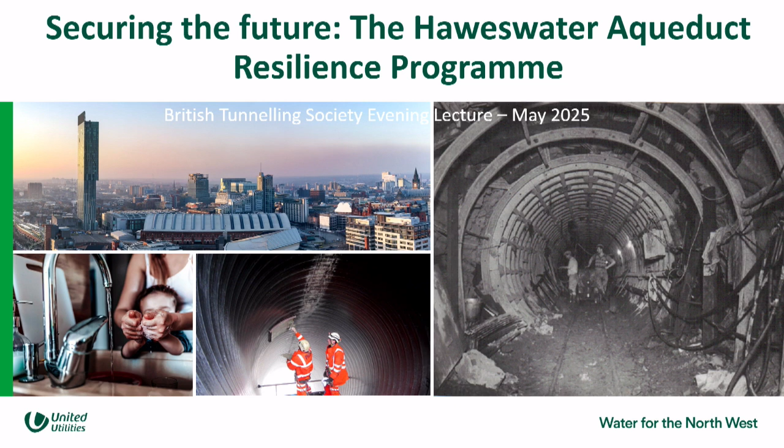So again, just to reintroduce myself, John McNeil. I work for United Utilities. I'm the Head of Programme Delivery for the HARP programme. And then Nick, who's online. Hopefully you can hear us, Nick, and you can say hello. No. Okay, he'll join us later, I'm sure. So Nick will be dialed in, but he'll jump onto his part of the presentation shortly. Oh, is he there? Yeah. He's behind you. We just need to unmute him now. You can see me but can't hear me. We can hear you now, Nick. Perfect. Hello. So that's, after all that, that's Nick's welcome.

So listen, it's fantastic to be here tonight. Thank you so much for the invite. Myself and Nick are both chartered civil engineers, so to be in this forum delivering this to you tonight is a real honour, so thank you for having us. This lecture will explore one of United Utilities' most exciting projects we've ever done. As a company, we're super excited about this. We haven't yet started fully with it in terms of on-site, but we've been at this for absolutely years, and I'll take you on that journey tonight.

So this presentation is going to focus very much on the early phases of the project. We'll take you through how we've identified the problem, how we've identified the solution, and how we've gone about delivering that so far. So what we're going to cover is a little bit about ourselves, United Utilities. We'll introduce you to the Haweswater Aqueduct itself. What are we doing and why? We'll talk about how we're going to do this as well, because this project will follow what for us is a completely novel and new delivery approach, never before done in the water industry, never before done by ourselves. Nick will take you through the technical considerations associated with the project, how we nailed the engineering imperatives really early on. We're going to choose one of our tunnel sections in the Bowland tunnel, which is in the Forest of Bowland, which will just bring to life some of the challenges on one particular tunnel section. We'll talk about planning and stakeholder challenges, and then we'll summarise. So hopefully that will cover and encapsulate the full Haweswater Aqueduct story.

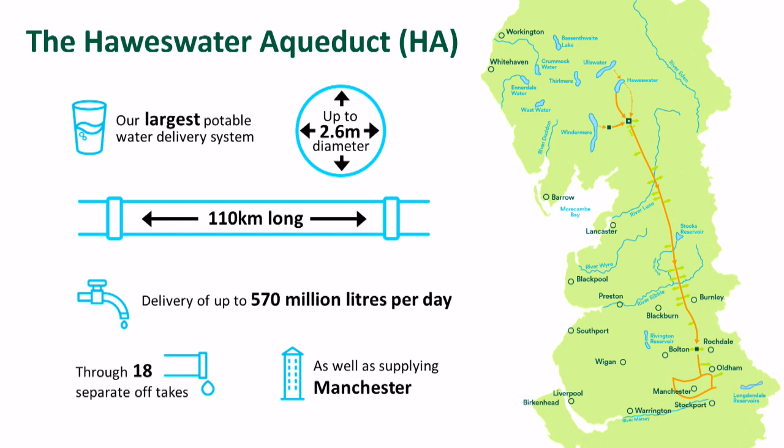Whilst it predominantly feeds Manchester, we also have 18 off-takes as it moves down through Cumbria, Lancashire, into Greater Manchester. So we feed an awful lot of people on the way. Really, really important asset to us.

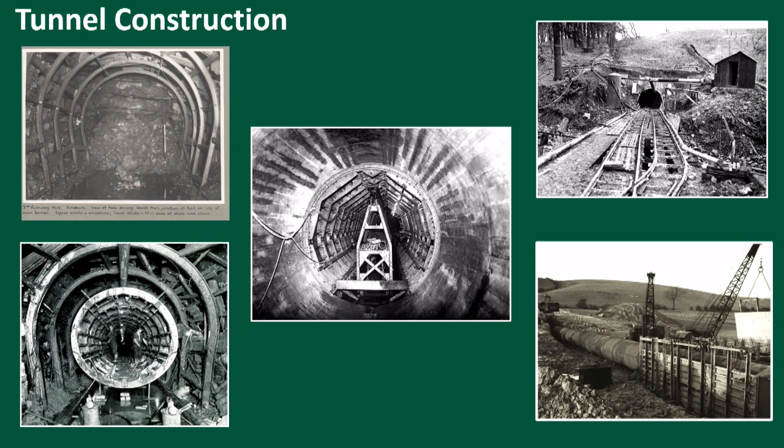Pictures on the top right show how they got a lot of this in and out, temporary railroads. And not all of the Haweswater Aqueduct tunnel sections are done in that way - some of it was actually open cut, which you can see bottom right. So, incredibly important asset. It's been around now 70 years, and it's critical to our operation.

However, things age, and over the years we've begun to worry about its condition. Now, the siphons that I showed you before, the wiggly lines, they can be inspected relatively easily because there's 4 of them. So you can take one out to inspect it, to maintain it, while the water flows through the other 3, and you can work your way along. However, the tunnel sections are single points of failure, so it's been impossible to go and inspect this without shutting the whole thing off. And bearing in mind how important it is, that's just not been feasible.

We did try to have a look inside the tunnel by floating some cameras, literally in the live water down, CCTV. Didn't really work that well, as you can imagine, with this thing carrying that amount of water and everything that's going on in the tunnel. So that didn't really pass as an inspection.

So we knew when we got to around 2010 that we needed to take some other more fundamental steps. And we began to consider the option of just shutting this thing down - we're going to have to shut it down to get in and have a look at it. However, to shut it down and lose a third of your water needs some planning. So we had to invest in tens of water treatment works to make sure that they could run absolutely full chat when we turn this thing off, so that it can provide water to our customers.

But the absolute deal breaker was something called the West East Link Main, a project that I worked on, where our system until then was quite divided. We had Lakes water that fed into Manchester, the Manchester system, and we had water from Lake Vyrnwy in Wales that fed into Liverpool, the Liverpool system. And just like the football teams today, Manchester wouldn't speak to Liverpool and Liverpool wouldn't speak to Manchester. So we built a 55-kilometre bi-directional set of pipes between Liverpool and Manchester that effectively joined those two systems.

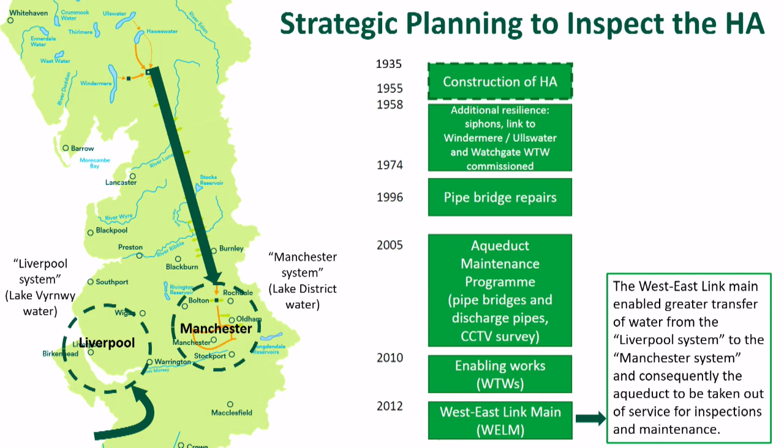So, recognising we only had that limited window, our operational colleague said, right, we can use all these assets you've built us, but we can only give you 2 weeks, or maybe 4 at a push, which is not a long time. And that's because whilst we can increase our reservoirs, increase our regional storage, this thing carries so much water, we can't survive without it for too long. So only having that limited time meant we had to plan, and plan, so we could use every minute to maximise that opportunity. So, believe it or not, we created a Haweswater Aqueduct inspection training camp.

We trained over 400 people in confined space training, in driver training, in emergency evacuation procedures. So this is people who are going to be asked to go down into these tunnels that have not been inspected for 55, 60 years. Defibrillator training, self-rescue training, because the emergency services, as we know, will not go very far into the tunnel at all.

You had to literally be your brother's keeper. This was that on absolute steroids. Could we get someone out if something happened? So we built this training camp.

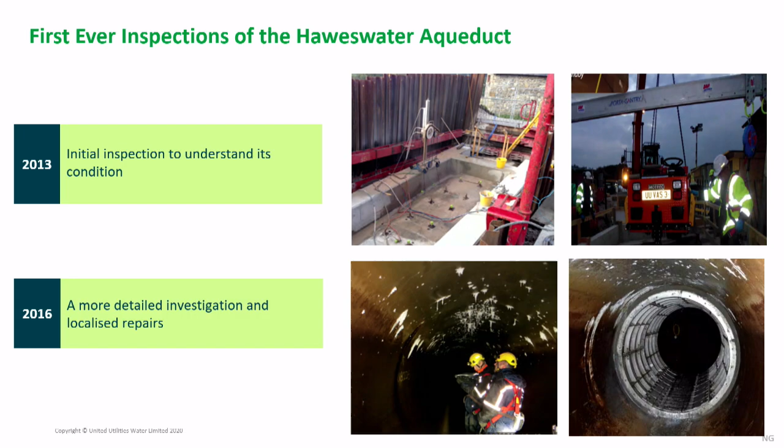So we've been in twice, and we did see things that concerned us. We were able to build quite a comprehensive picture of what was in there. So you can see the range of surveys we were able to carry out, whether it's GPR surveys, EDM surveys, water quality, 360 laser surveys.

You can see the pictures at the top about how the VAS units were adapted to get specialist equipment in. We took some cores, we filled them in before we came out. But after those two visits, we really began to understand what was going on in this aqueduct.

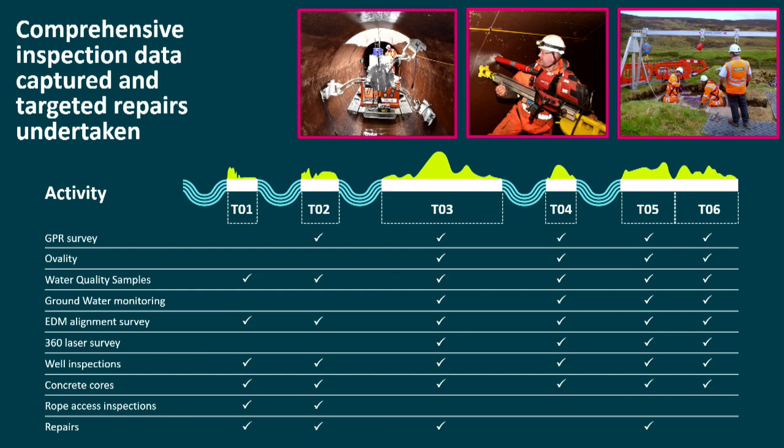And it raised some concerns, two concerns really, and this is what is driving the whole of HARP. So we had a concern about water quality. Could we, hand on heart, say this thing was going to remain a pure food grade product conveying tunnel in the condition it's in? We think we needed to act on that.

And secondarily, there was a broader concern about the interruption of supply to water. So if, heaven forbid, we had a structural collapse, then having dirty water is one thing, having no water is a completely new ball game, because obviously you can do boil water notices, you can flush your toilet with dirty water. If you don't have any water, then it's a whole different matter. So really, they're the two risks that this whole programme is trying to address.

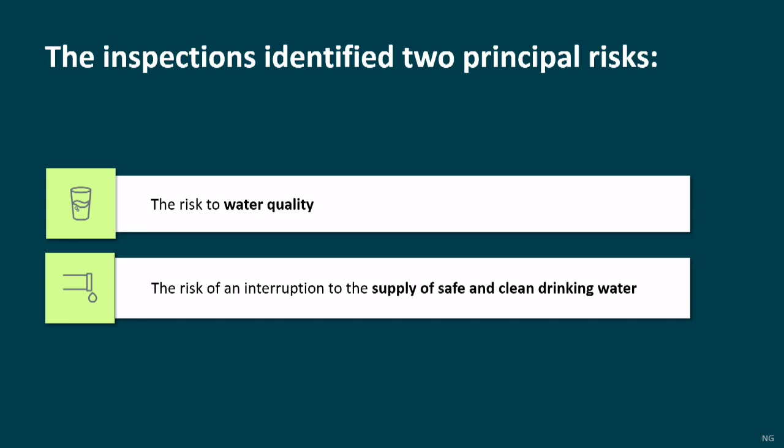We did spot a really worrying part of the aqueduct when we came out, and we immediately mobilised to fix this because it was in need of immediate attention.

So we've been in already, and one particular section we've kind of bypassed. If you remember the 4 wiggly lines, the 4 siphons, we broke into those. Again, this is now the 3rd outage. We connected pipes into that. We ran the pipes along a length of the tunnel and connected back into the tunnel, bypassing this concerning section. So we replaced about 2.6 kilometres of the tunnel.

It cost us £36 million. In terms of this, to give you an idea of the scale, those pipes there that you see the 4 people stood in front of, they're 4 1.6 metre siphons. Hygiene in the middle there, again, absolutely critical, as it always is on the HA.

And one thing that we did in UU, which for us at the time was really quite innovative, is on the bottom right, we were able to use CAD and 4D modelling to do a 4D rehearsal of how this is all going to play out. And we've never done that before. Where machines are going to go, what are the lifting circles, where's plant going to go, where's equipment going to go, where can people walk. And it literally allowed us to make these vital connections far shorter than it would have done had we not had that sort of planning.

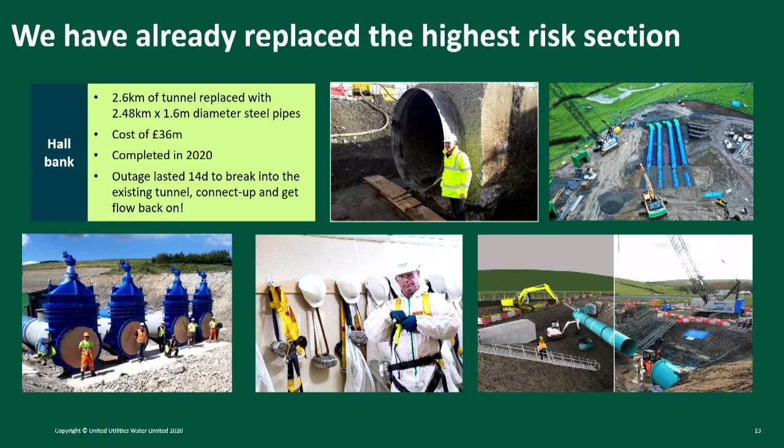So fantastic to get that bit out of the way. But that was only a bit. We still had the rest to sort. So once we'd put that bit to bed and we'd addressed that, we sighed a bit of relief, took a step back and started to reflect on, right, what is it we need to do going forward?

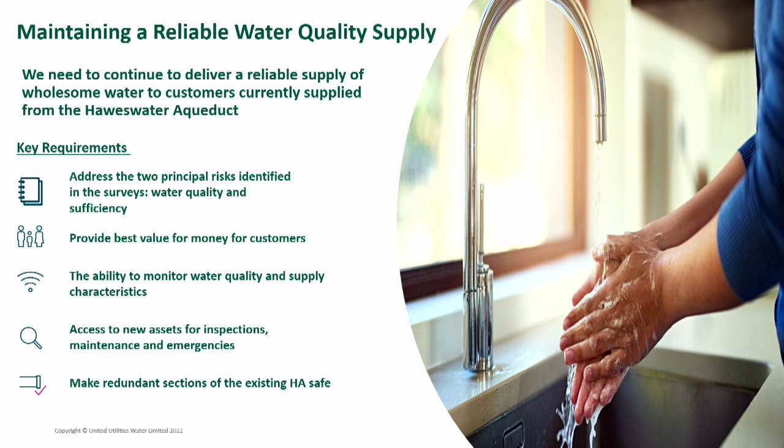What are the requirements to address those 2 risks we mentioned before? Key thing is to address the risks, as I mentioned. We need to provide best value for customers. We're a regulated monopoly business, but we are regulated by Ofwat, our economic regulator, so it's critical we look at a solution that gives best value to customers. We're keen to be able to monitor water quality and supply characteristics better than the old tunnels ever gave us, whatever the solution was. And we needed to factor into our thinking, how do we make the old tunnels safe?

So with those requirements in mind, we set about looking at options, and we really cast the net wide on this. We started off with over 300 options. We coarse filtered it down to 50, to 30, to 10. We got into fine filtering, but we looked at everything.

We looked at, can we simply go into the existing aqueduct and just patch it up, make a few repairs, it'll do - one option. Can we convert it from being a potable water tunnel to a raw water tunnel, so we have raw water coming all the way into Manchester and build a super treatment works down in Manchester - another option. Can we treat it en route? Can we line it? Could we close it down altogether, get rid of it and look for different abstraction options elsewhere?

Manchester Ship Canal, groundwater supplies, River Dee, etc. No stone was left unturned. We looked at absolutely every option.

This whole while we're in communication with Ofwat, sharing our ideas, giving them an idea of the way it's going. We looked at capital cost, operating costs, carbon. We had customer focus groups, willingness to pay, because this is going to be an expensive job, right? So we had acceptability panels - would you be happy to pay X amount on your bill if we went with this option or this option? And obviously looking at environmental and service benefits.

So we did all that, and what we came back to is that the preferred way forward was actually to create new tunnels to replace the old. And you kind of think that took us probably 3 years to get back to the answer where we started. But it was a job well done and gave us that surety that was the answer. And so that was it.

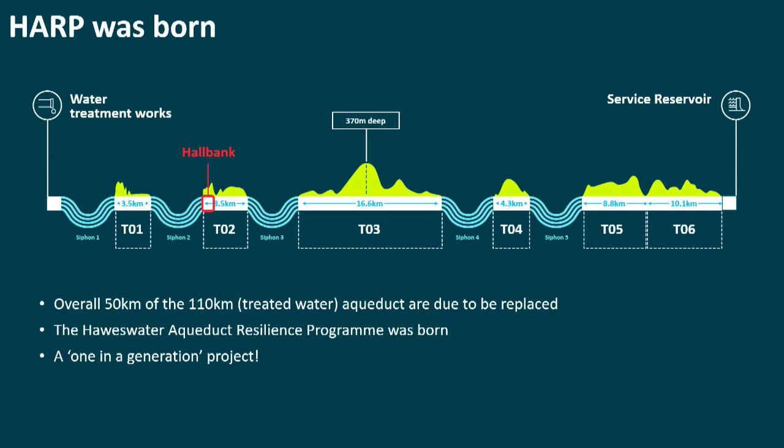I'm just going to show you a little video now, just to bring some of that to life.

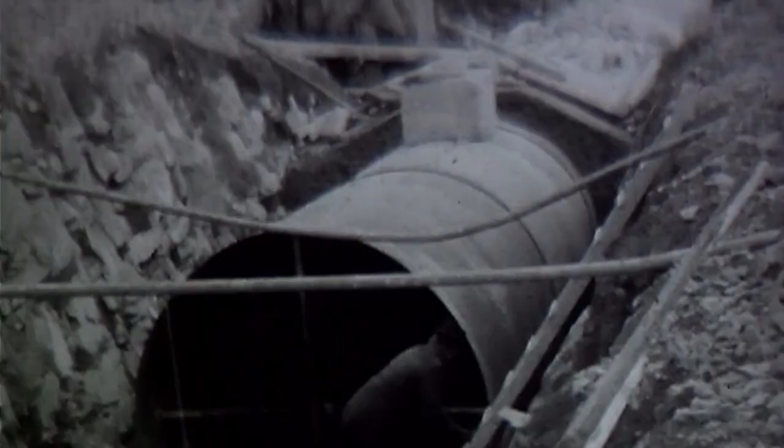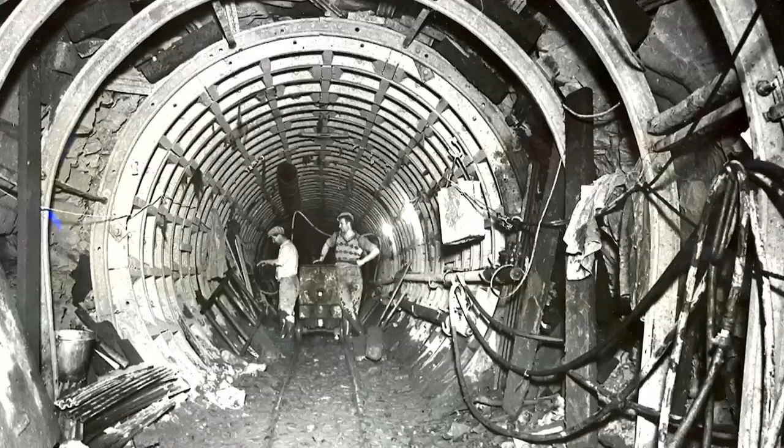The aqueduct is now of great importance to Manchester district, to the surrounding industrial area, and to many water undertakings supplied in bulk by Manchester. The ultimate and far greater importance of the Haweswater Aqueduct, when 100 million gallons of water a day are being delivered, will surely cause future generations to be very thankful for all that has been accomplished.

Okay, so that first bit has all been about what we plan to do and why. Before we jump onto the technical aspects, I just wanted to explain the how, and it's how we're going to procure this. As a UK water company, our economic regulator is always looking at ways of encouraging more efficient ways of delivering schemes, particularly schemes at this size, for the benefit of customers.

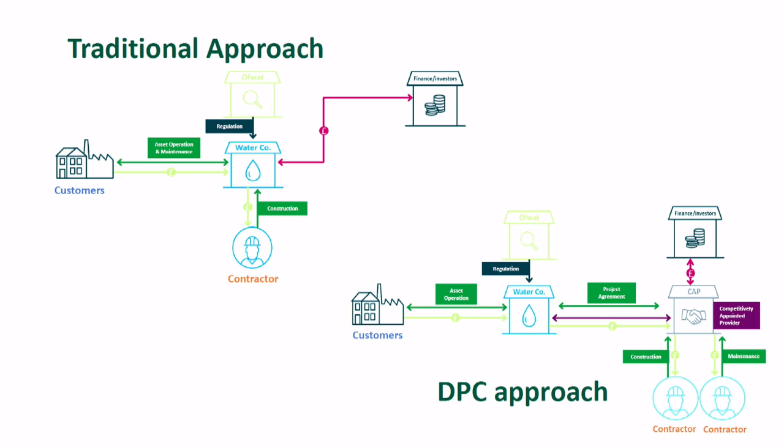The late model is a slightly different twist, obviously, where the appointee holds on to it for a bit longer. So they might develop the design themselves to a higher level, they might initiate studies, get the planning in place, and procure it a little bit later.

We chose the second option for HARP. We went for the late option, and the reason for that is we felt in the interest of our customers, they would benefit by us de-risking the project by holding on to it that bit longer. So bearing in mind the characteristics of the HARP project, tunnelling, ground, having an understanding of the ground and the ground characteristics and the risk, we felt would be better to do that before we approach the market.

It also allowed to de-risk the sort of schedule breakers, so purchasing land, getting planning in place, things like that. We thought we can do that. That will obviously make it a less risky proposition.

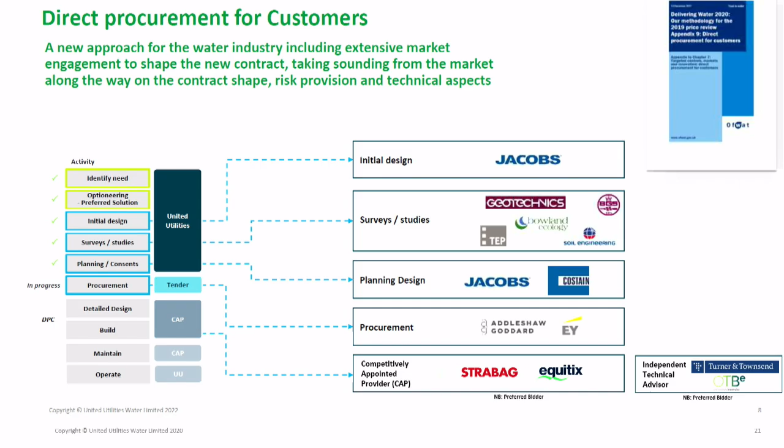So that's where we are on the overall timeline. It's been a long-running beast, this. We are here just at the end of that tender activity, and we're looking to step into financial close or contract award in the coming couple of months. We then are looking at probably a construction period of 7 to 8 years, with multiple tunnels being driven at the same time. So hopefully we'll have a brand new aqueduct come 2033, and then after that follows the 25-year concession period where the CAP still owns and maintains the asset.

Okay, that's me. I'm going to hand over to Nick now, who's going to jump into some of the technical considerations of how we've got to where we've got to on HARP.

So I'm hoping the tech works. Oh, he's there. Brilliant. Hopefully, John, you can see me. Can you hear me? Yeah, we can see and hear you. Brilliant. Okay, thank you for bearing with me the fact that I've had to dial into this. Yeah, I'm sorry for not being there in person.

As John suggested earlier, my name's Nick Sharwin. I'm Head of Construction for United Utilities. Today I'm going to delve into a couple of the aspects around the technical considerations on HARP. We'll be looking at the engineering imperatives, which, building on the work that John's done, are those things that the organisation as United Utilities deemed important that we wanted to cover.

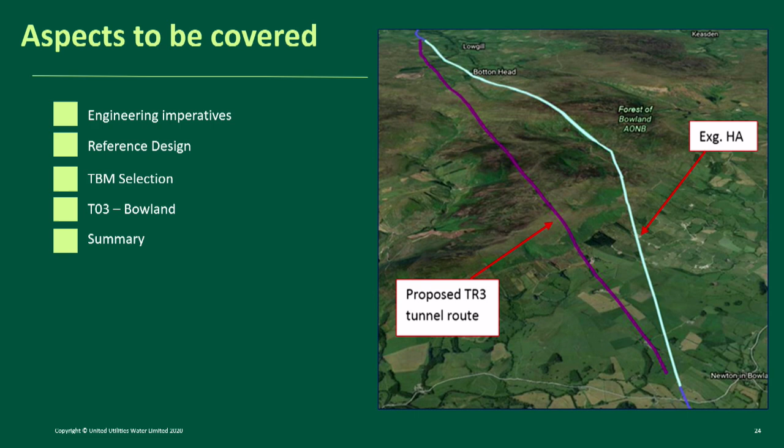Okay, so we'll go on to the engineering imperatives. This is really what, from an engineering point of view, is important for United Utilities, and some of them are actually enshrined in what we call our output requirements. Just the things that are really important to us.

John's already touched on the fact that it's a potable water tunnel, very different from a tunnelling point of view. The fact that this will be carrying potable water, so the work we're doing around water tightness, for the water quality, is really important - that we can be comfortable and confident that the asset we design and construct does provide that water tightness to ensure water quality.

The other thing is reputation-wise, very key - the engagement that John spoke about earlier, to get to where we've got to so far, really engaging with the supplier, with the customers, to make sure that this is going to enhance our reputation. The length of the aqueduct all the way from the Lake District right down to Manchester means we are dealing with a huge different number of communities and stakeholders and customers. So we really needed to focus on that and make sure we were considering that. John will cover more details on that in the upcoming slides.

Connections - it's really interesting just to think about HARP as a tunnelling job, a nice and easy tunnelling job, like all tunnelling jobs. But the connections can be somewhere where it can be a little bit more difficult, and certainly when we interface with operations, making sure we do that appropriately. John's explained the challenges around getting outages for this aqueduct, so any of the connections we're looking to do, we needed a good understanding of what we needed to do and what the controls and engineering imperatives were around that.

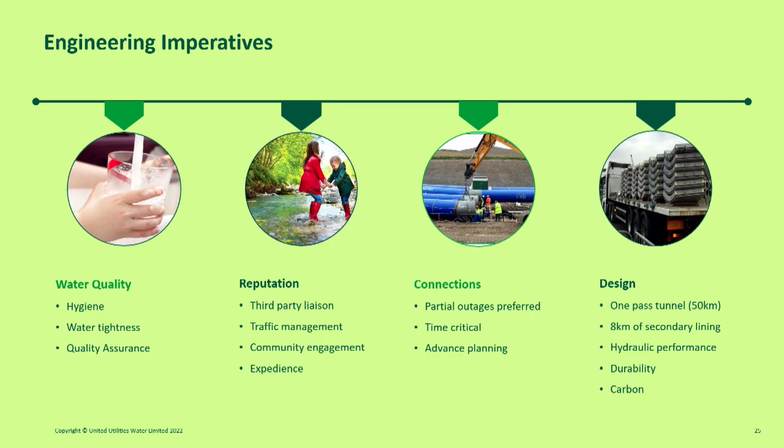I'm going to start with carbon, so just look at the carbon approach that we took on HARP. Large infrastructure projects typically come along with large carbon impacts. I don't think it's unusual for people to see that, but we recognised as the project team, working with our partner Jacobs from a design point of view, we started thinking about this early and looking at how we can actually baseline what we believe the carbon impact would be. So we baselined that early to get an understanding of that.

Which was good from our point of view, because it then started to identify some early opportunities. You could look for your biggest wins, look where the impacts were, and where we could look to try and do something differently. And with it being the late model we went for, there were real opportunities that as the appointee we could get into.

So John's already spoken about things like land and getting purchasing in place. One of the big things we've put in place is around power. We're all aware that tunnelling machines are a hungry beast, and getting to some of these sites is difficult. They are in remote locations. So if we hadn't grabbed that early and got the services in place, we would have been running these tunnels on generators. So we really looked to grab that early, make an impact on that.

The other thing, the picture you can see there, it's an old quarry. We looked to secure the use of that local quarry very close to the Bowland Forest tunnel. So we're going to work with them there just to minimise traffic movements, but also minimise and enable that reuse of tunnel material. So once we did that, we took it as far as we could.

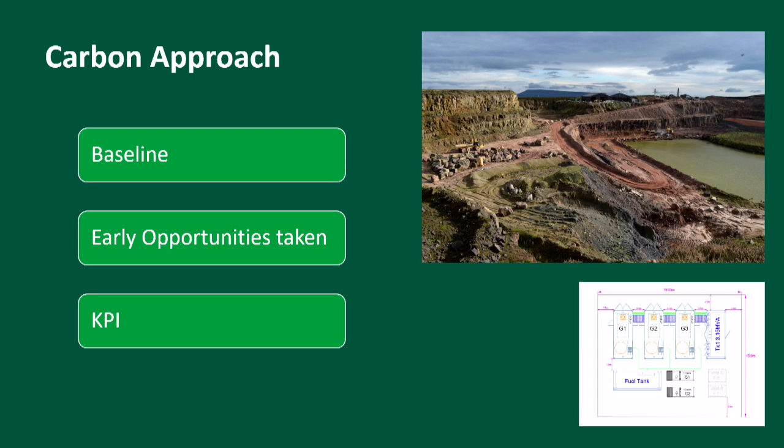We then started to look at how we can measure performance through the project and ensure that the competitively appointed provider was taken on that journey with carbon. So within the PQQs, the pre-qualifications, the invitations to tender, the tender scoring, there were measures and questions allocated around carbon to ensure that we continued on that, with ultimately the contract having strict targets to outperform the baseline and look to see where we can really maximise that through KPIs.

So building a little bit on that and going a little off topic, I just wanted to talk about the Net Zero Tunnelling Group, nothing to do with HARP specifically, but something that I've started to get involved in, and some of you may have already heard of it and are actively involved in it. This is a new group that was launched last year, linked with the British Tunnelling Society, a subsidiary of the BTS. The purpose really is to accelerate progress towards net zero carbon tunnelling by sharing knowledge and ideas and shaping best practice.

There's a QR code we can share, and a couple more slides just to show who we are, some of the faces there you may recognise. There are more people actively getting involved. Just to give you an understanding of the first six action groups that we've developed, to try and help drive the tunnelling industry particularly forward with this.

So the digital tools about carbon calculations and measurements, really important, because everybody's got a slightly different way of doing that, and to really drive this forward there should be a standardised way. Looking at design, what impacts can we have from a design point of view. Material use, looking at innovative materials we can use. Just a step-by-step guidance of how we can support carbon reduction within tunnelling, mapping along to PAS 2080, bringing that along within the industry, making sure tunnelling aligns with that, and then exciting opportunities around geothermal engineering from underground structures.

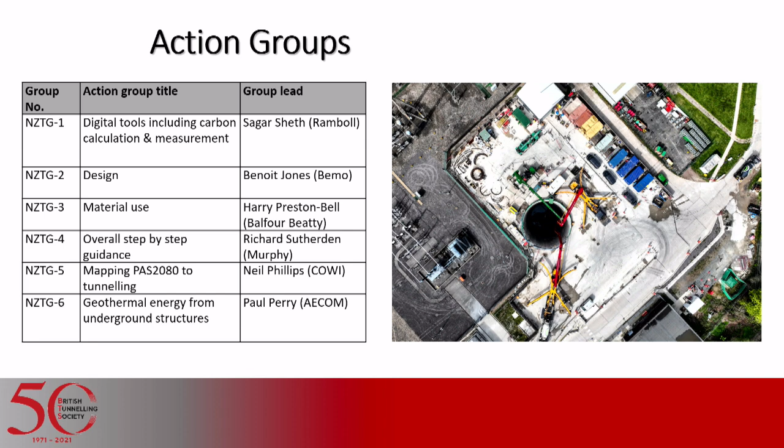So there's a few names there, just to help doing that. If anybody is interested in joining that group, please contact us. Just share the information, allow people within the industry to understand what this group is about. It's a fledgling group, it is starting out, but the more people that get involved in it, the more we get a chance to spread the word about it, the more impact it'll have. So a bit of a plug there for the group.

So we'll go back into HARP now. Level of design, quite interesting - we had lots of debates about the level of design that we might want to undertake. We were very conscious that there were certain things we needed to firm up for ourselves, making sure we were comfortable with the level of design, some of those engineering imperatives and outcomes we were looking for.

As a business, we needed some element of certainty from a design point of view, from a water quality point of view. But there were also areas around planning to get this project moving - we needed to get the planning secured, the environmental impact assessments undertaken. So some of the ways of working, some of the methods had to be developed to a level that would enable confidence.

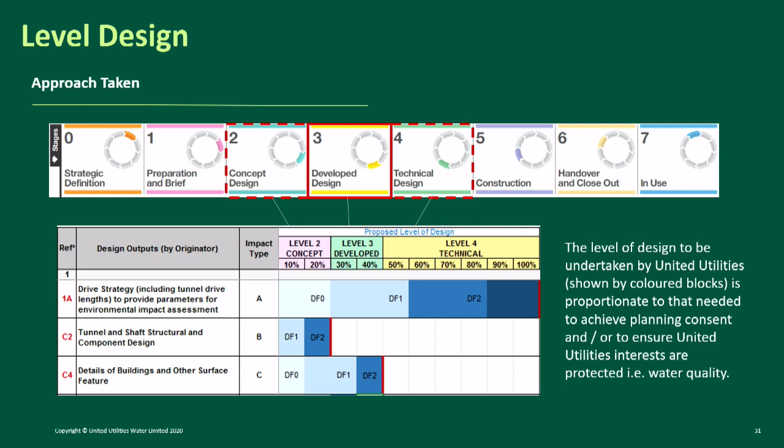So a varied approach to the levels of design, which worked pretty well for us - I think that was a positive thing we looked to do. Next, the reference design - I'll touch a little on this. Again, it's building on the DPC model we look to work with, the late model, so we had to support that. There were some elements of design we needed to take further to help with planning and the consents.

For example, John's spoken about the ground - really important for any tunnelling job and shaft sinking job, you've got to understand the ground. So we needed to make sure we could get that. We did utilise the early contractor involvement with Costain - we appointed Costain as our ECI, and they helped identify some of these key considerations as we worked through this design and determine solutions that could be implemented to overcome those key considerations.

But we were always minded to be aware of the flexibility we had to leave in the cap. We couldn't be defining all these things to the nth degree, specifying tunnelling machine specifications, writing those types of things. We had to make sure it's proportional to enable that flexibility, to drive that opportunity for the cap to innovate. But there were specifications we did look to provide - back to water quality, the water tightness, the longevity, all those types of things - we made sure we specified that, ultimately confirming we did have a deliverable solution.

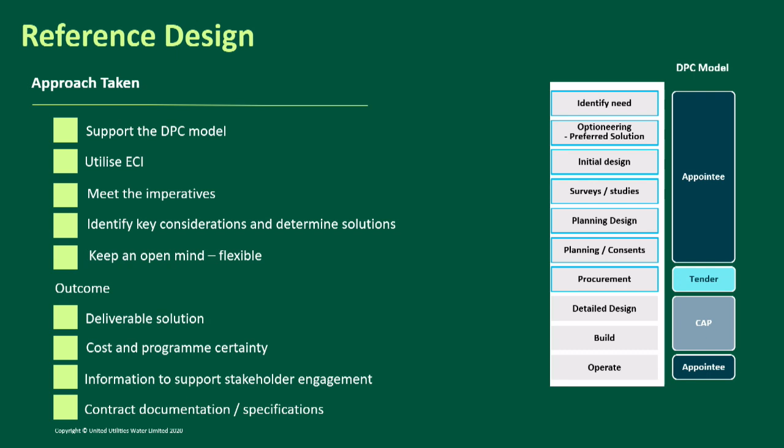So we'll move on to a couple of the key factors we looked at for the tunnelling. There are many ways you can determine what these factors might be, but we set out a framework for all of the tunnels we looked at, just to step through each factor that we thought needed to be confirmed.

So again, no real shock here - we're going to start with the ground on a tunnelling job. Just trying to understand what the expected ground conditions would look like: strengths, jointing, pressure, gases, atmospheric things, water flow. Then what is the groundwater condition we may be coming up against - pressures, volumes, that type of thing.

Permeability, we've got the tunnel lengths and the drives, we needed to look at those. We've got the anchor points for the wells, for the siphons, as John's shown earlier. There isn't much you can really go away from that point of view, so you've got the ultimate length almost defined from that.

Diameter wise, the hydraulic requirement for the diameter is about 2.6 ID, 2.7, something like that. That was a minimum, something we defined early on - it had to pass a particular flow. We didn't specify a diameter, we just specified a flow that we wanted, a volume we wanted through the tunnel. We wanted to convey it by gravity.

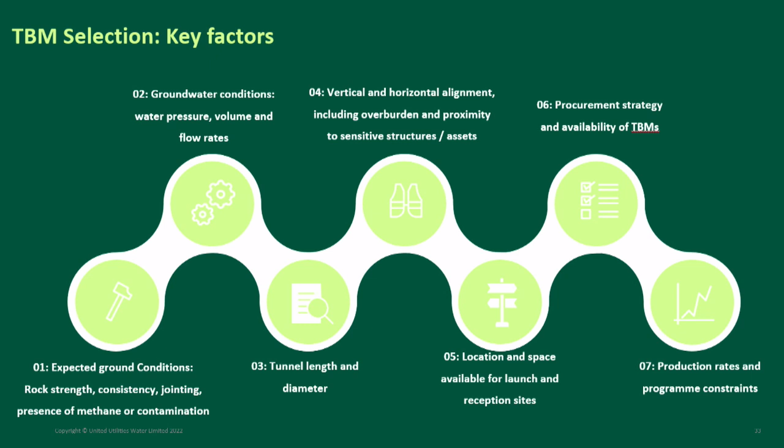And then having a think around that about production rates - what is particular machines and likely production rates going to be, and how will those programme constraints impact on the other tunnels and potential connections back into the system for the outage. Those were some of the key factors we considered.

So building on the first one for the ground - I think when we first started to have a look at this, and you look through lots of the old historical records, you've seen some of the photos that John put up in the video. We got some really, really good photos and geological records, geotechnical records for the existing Haweswater Aqueduct, lots of face records, lots of drawings, everything from that point of view. So that was a really good starting point.

But obviously we're not going to build the tunnel exactly where the existing tunnel was. So the face records, although interesting, weren't necessarily a true reflection of the route we were going to pick. There was definitely a challenge around the ground investigation up in the north - very remote access, and central sections in an area of outstanding natural beauty. There weren't lots of historical records around there in terms of others using the BGS records. And as you got towards Manchester, there were lots of good records, but again access constraints in industrial areas made it difficult to get access.

So we worked really hard at thinking about how we can get enough information about the ground to provide us with confidence, but also supply chain confidence that we understand this ground and that it can be managed and priced appropriately. So we worked really hard to look at geophysics - shallow geophysics, deep geophysics, and we did some boreholes.

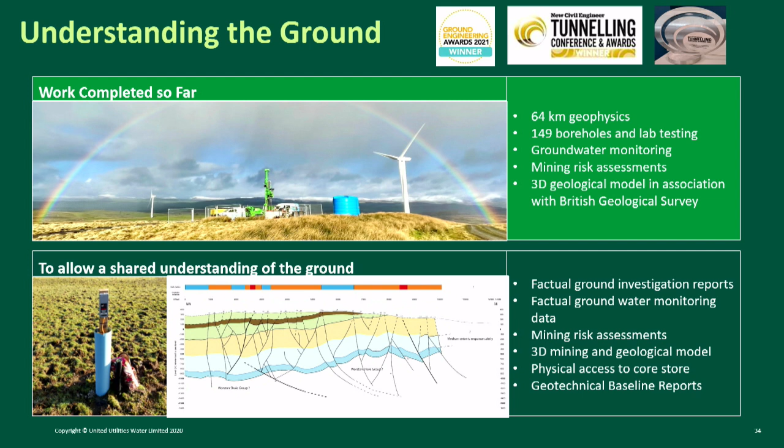So with the boreholes that we had, the geophysics that we had, and some targeted areas around faulting zones and things like that, we were able to build a really good 3D model that ultimately helped us develop a robust geotechnical baseline report and a GBR that the market were comfortable to work with.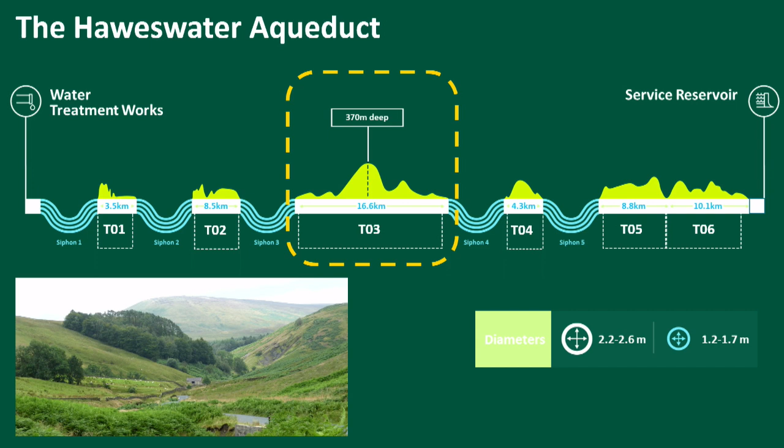So we'll go on a little bit more about Bowland Forest. We've picked that really. If you look at that section on the screen now, it's the interesting one for me from a tunnelling point of view - it's the longest tunnel drive there, and the deepest. So your eye is ultimately drawn to that. Initially, it was like, what's going on in there? That looks interesting. So we'll run through some of the key challenges we've got there.

So a little bit about the Bowland section, Trough of Bowland. Anybody that knows it, you've got the Forest of Bowland there. The graphic on the right hand side shows we are in the middle of nowhere. You can just about make out it's a bit of a forest and we're going over a fell. The photo on the left is just an indication of the remoteness of it really.

There's one long track that meanders across the fell, not particularly easy access. That's what we had - a remote location, rural communities as well. The last thing they were probably expecting when we first turned up was to say we were going to build a new tunnel through there. I think some of them were unaware that there was a tunnel there, if I'm being honest.

Lots of farming, environmental impact, area of outstanding natural beauty. We had Ospreys in the area, triple SI, lots of things you'd expect looking at a Google map of the area. Nice part of the world, with lots of people for tourism and that type of thing. Doesn't make it easy for building tunnelling projects.

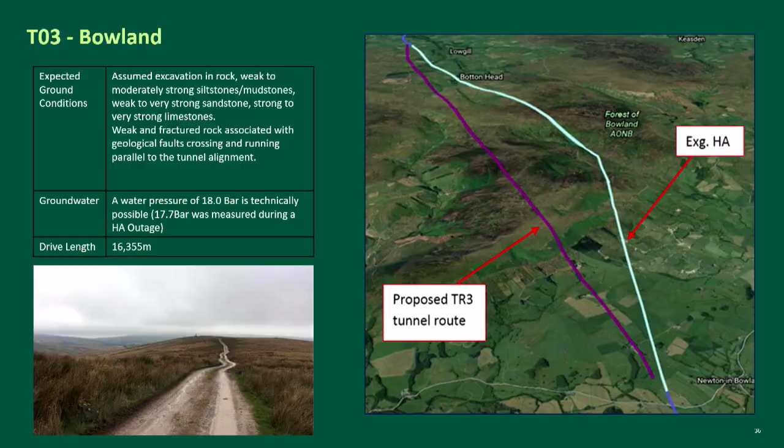So if we look at the technical aspects, trying to show with the graphics on the right hand side, the depth - 300 metres plus tunnelling, not something I've typically expected to do within the UK. The bottom section, the blue line is the existing HA, the others were options. We looked at a number of options on all of the drives, but particularly in the Trough of Bowland.

16 kilometres, we were very, very nervous about that length of drive. Is that something we can do at this diameter? Are we sure we can do that?

We did look at alternative locations for intermediate shafts. The green area on the bottom right-hand graphic is the area of outstanding natural beauty and the triple SI, so building anything within there became very difficult - you saw the access to that. And ultimately you'd then have to put an intermediate shaft that was circa 300 metres deep, again not a particularly easy task sinking a shaft that depth. And what benefit would you ultimately get from doing that?

So access was very difficult from the northern section, the left hand side of the graphic, so we had to drive from the south. That became quite obvious quite quickly - just getting vehicles, HGV vehicles, to the northern section was difficult. So that became the obvious drive location, driving uphill from that point.

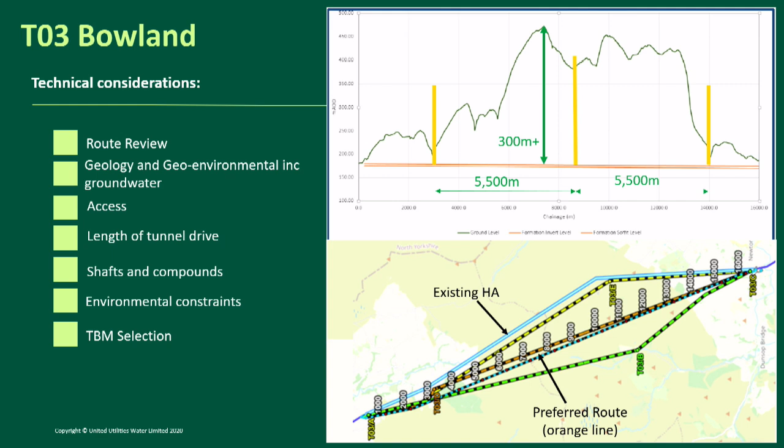And based on all that, we went through the TBM selection that I spoke about before, which we'll cover. So I'll look at a couple of these technical considerations now, just to try and bring it to life.

Again, access, we've spoken about the challenges and difficulties getting across the moor. Site locations are typically significant distances from major infrastructure, with rural roads and through rural villages. We worked hard with Costain to understand what traffic movements would look like, working with the council and locals to figure out how we can make this project work. We're not going to be nipping in and out here, we're going to be here for a number of years, so we need to minimise that impact on customers, the local community, the environment and businesses.

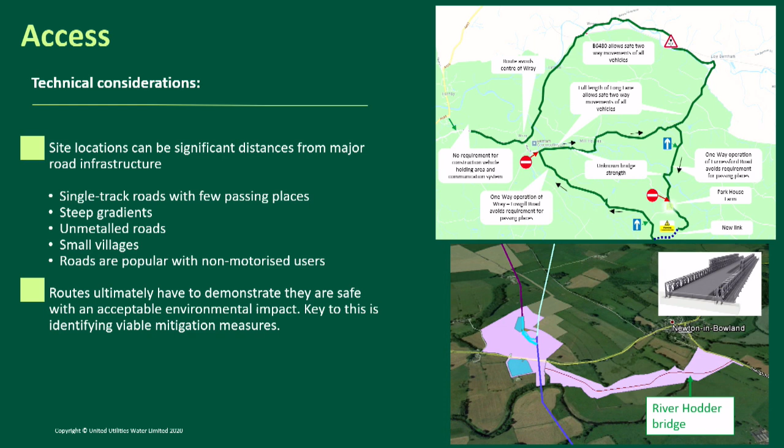The graphic on the right gives an idea of the diversion routes we're likely to put in place and how that can impact the community. The bottom right graphic shows the route to the launch compound for the Trough of Bowland. The Bowland Forest needed a couple of kilometres of road, ultimately with a bridge across the River Hodder. That bridge we're putting in is going to be about 100 metres, just to keep you outside of the EA flood zone. So significant temporary works and infrastructure has to be in place before we even look to do tunnelling. But the communication we've had with stakeholders and customers, they've been accepting of that and understood the approach we've taken.

Going back to the groundwater, I touched on this a little before. As part of the existing HA inspection, we believed the water was maybe 17 or 18 bar pressure. There was a little scepticism about how true and real that was. But then we undertook some ground investigation and hydrogeological assessments, and a number of times it came back suggesting it was at 27 bar.

A machine at this utility size, down the 3, 4, 5 metre diameter, operating at that pressure isn't something I've necessarily heard of or done, and I just don't think it's achievable getting seals to operate like that. We had a good conversation with a number of manufacturers and found it difficult from a temporary point of view, but from a permanent point of view, we've already established that water quality is absolutely imperative for United Utilities. We need a lining design that can meet BTS class 3 and protect that water quality. So how do we do that with a potential external groundwater pressure of 27 bar?

So we engaged Motts to look at some lining design, and to determine the feasibility. We spoke to gasket manufacturers to get their thoughts, what their research told us, what examples they might have. Keeping in mind we were predominantly looking for a one-pass tunnel lining system. So a real challenge to keep the water tightness at class 3. We're conveying potable water — how do we get this to work?

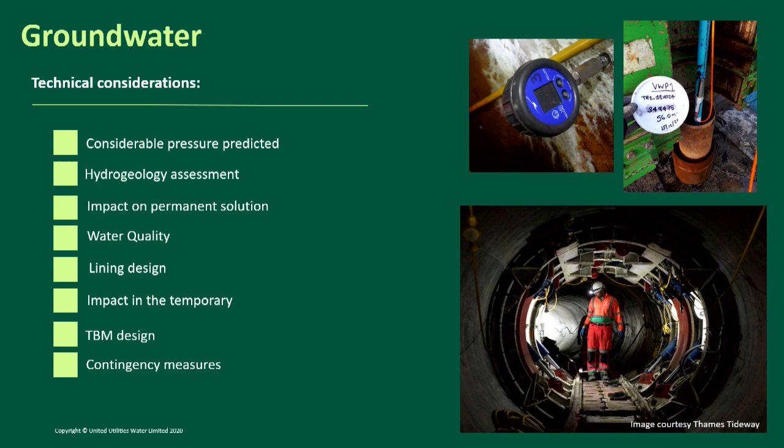So I've touched on the temporary works a little there. Alongside the water pressures in this particular tunnel section, we've got the length of the tunnel, 16 kilometres, again outside the norms for this typical diameter of utility tunnelling. Not something we've done in United Utilities. Some people have done above 10 kilometres — I know LPT2 just completed their tunnel down in London at over 10 kilometres. But again, it's not an everyday run-of-the-mill activity to build tunnels at this diameter for that length.

So we looked at talking to people, tunnel manufacturers, talking to contractors, and making sure through Costain we could satisfy ourselves that we could do it safely ultimately.

Can we build a tunnel, or can we expect the competitively appointed partner to build a tunnel that's 16 kilometres long at this utility diameter safely? So we had several meetings with the HSE to look at the practicalities of the long tunnel. Really important that we could come to an agreement that a particular tunnel diameter is appropriate for this tunnel length. We looked at the ventilation, the fact that the machine is going to be an open face machine, the ventilation and the atmospheric monitoring, really important to make sure that that was in play. Emergency planning, making sure that we could get a casualty if we required out of the machine, making sure we could do that in a safe and practical way.

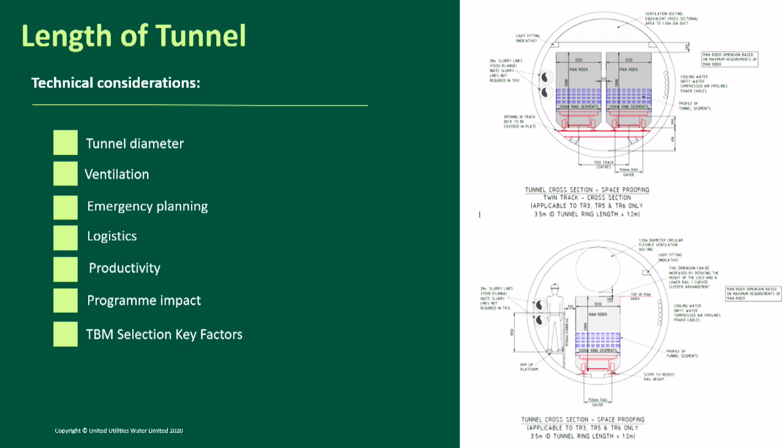So if we sort of tie that back together for T03, the technical issues, for this particular tunnel, we've got the moderately hard rock for the tunnelling machine. There'll likely be high attrition rates on the TBM. We've got faulted zones that we identified through the geophysics. We did some targeted ground investigation there to prove that those faulted zones were there. There's an option to pre-grout some of those areas to try and tighten that up, because the expectation is that we'll more than likely get the flow of that water and that pressure from those faulted zones and the potential fissures that we might have on the way.

We did feel the open face TBM was appropriate. That's what we worked with our reference design. This isn't conformed into the document. This isn't anything that we specified. This was just to allow us to convince ourselves and satisfy ourselves that it was achievable.

The challenging access that we spoke about on the terrain meant that the intermediate shafts were a no-go, and could we make it work for the length? We believed we could. So one of the things we did look at with the manufacturers was type of tunnelling machine, and settled probably on a double shield. Again, this is only our opinion, the work that we've done with the manufacturers and with Costain, but a double shield TBM open face would increase productivity and help with the programme constraints, meeting the programme. And then just that allowed us to understand the impacts that it had on the wider HARP project. With this being the longest tunnel, it naturally wants to fall along the critical path.

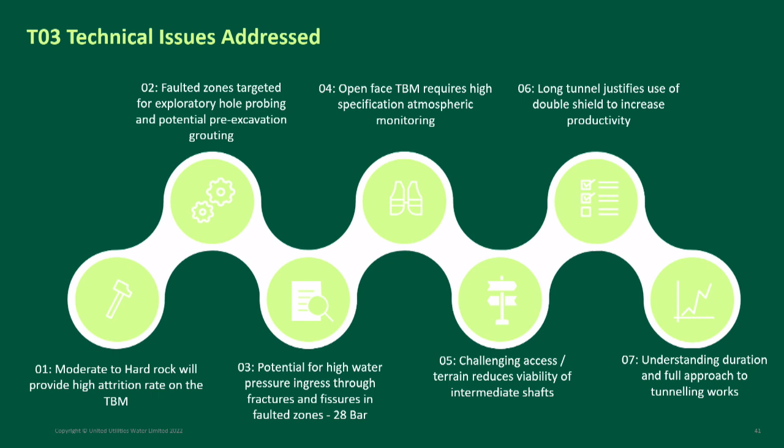So just to summarise the technical considerations, the real whistle-stop tour there on one of the tunnel sections. There's 6 of them, and they've all got their own exciting challenges that we've had to step through. So I think because we had the late model, we had the opportunity to step through these challenges. I think it was a really good thing that we did grasp the nettle and work with some of these challenges, really drive and understand what that risk looked like and how we could manage that.

Things like the groundwater, confirming that, I think was a real positive step just to understand what we may have. The proportional design approach that I spoke about before, I think we've delved into areas where we needed to delve into, and we've pulled ourselves back where we haven't had to. So that's helped us really with that and drive a deliverable solution that is positive. And I think because we understood where our risk appetite sat as United Utilities, we could really help with that proportional design approach where we needed to confirm that, whether that be about water quality or from a customer and stakeholder point of view. We could go a little bit further with the design, but leave opportunity for the supply chain. And all the good work that we did around the technical considerations really did help feed into the stakeholder conversation and support the approach as to why it was and make that a richer conversation.

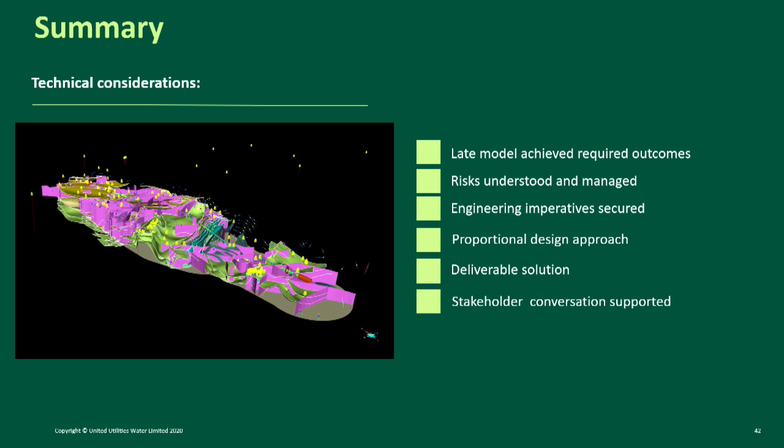As Nick mentioned before, doing all that outline design work really helped us engage with purpose on planning and stakeholders. There's clearly a vast range of people impacted by this scheme, and with HARP being a linear asset, it's long.

We've been speaking to 7 different planning authorities. We've needed 9 different planning permissions. Someone told me there were like 1,600 documents we've had to produce to get this over the line, including one with Yorkshire Dales National Park, which from a North West water company was a bit odd, but that was okay. I'm happy to say they're all now in place, so it's tick, tick, tick, tick, tick times 9, which is great.

We've put in place 2 extraordinary highways damages agreements, because if you think of the amount of traffic this is going to produce in fairly rural environments, and we're going to be working in areas of outstanding natural beauty, rural environments, urban environments, under the M6, under the West Coast Main Line, in remote locations - it's a huge range of challenges and a huge range of views and opinions from people.

MPs and council leaders, because this project's been going so long, have come and gone, so we've had to speak to them and speak to them again. I was up at Lancashire County Council yesterday, being introduced to the new council leader, a reform candidate. So there's a whole new set of MPs and council leaders there, right in the middle of the patch.

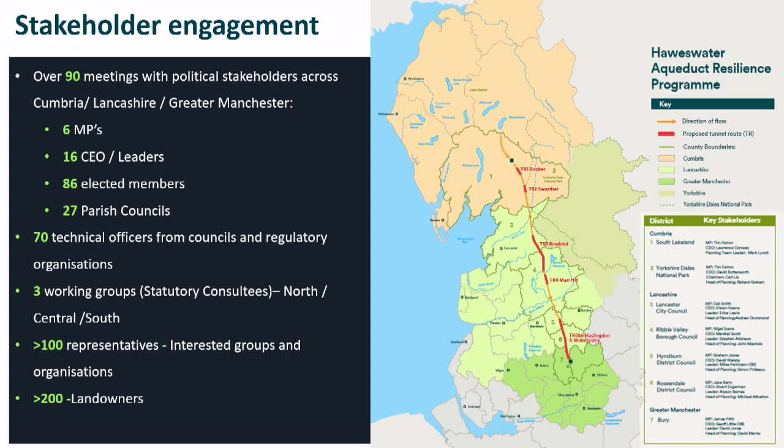We went big on HARP, like we do on all our major schemes, on public consultation. We were out there speaking to people, town hall sessions. Then COVID hit, so a little bit of an innovation for us on HARP is we took our public campaign online - we did virtual consultations.

So it's something we're going to look into going forward. It was the biggest consultation we've ever done - it probably needed to be. What came out loud and clear was people's worries about traffic and how it's going to impact them.

Nick's already talked about what we're looking to do in terms of temporary river crossings, temporary haul roads. We've got park and rides planned, and holding areas to avoid any HGVs interacting at any time with school pick-up and drop-offs at certain points. There's a massive programme of highways improvements before we even start doing anything on shafts or tunnelling. But it really shows the importance of engaging early and understanding what the pressure points are with folk.

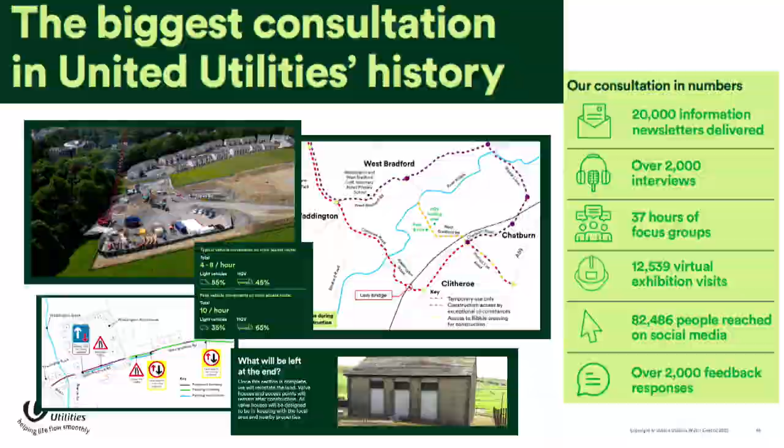Quick one on land - as a water company we're pretty well placed to gain access to private land to do work. Normally we'd secure the purchase of land for anything we build at the surface, and anything subsurface would be covered through notices. But with HARP being on site for so long, we went for a slightly different approach where we've majored quite heavy on land purchase - so buy the land, then it just takes it off the kind of risk, if you like.

Some of the reasons we're going to need land are obviously for the drive sites, reception sites, river crossings, haul roads, transportation hubs, highways alterations. To give you a view, that's one particular site - I think that's on TR2 that Nick was just taking you through. The green bit is where we've purchased land, the blue bit's where we're going to lease land.

And the yellow is like statutory notice. We've had to deal with about 88 parcels of land, 200 landowners. But again, we started it with plenty of time to get us to the position we're in today.

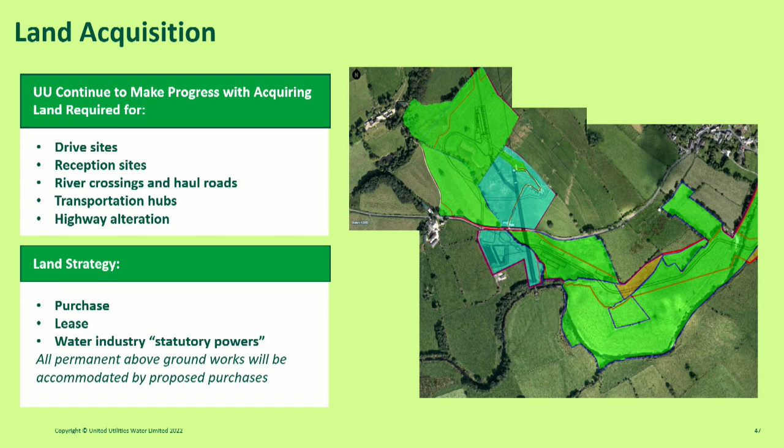And the last little bit - one of our values at United Utilities is to make the Northwest stronger, greener and healthier. We've really taken that on board with this scheme.

Social value and community investment's been massive. I don't know if you have Mad Science down here, but it's quite a big thing up in the Northwest. My kids go to it. It's a group of scientists in the local universities who come into after-school clubs.

They do little experiments with the kids. So we've hooked up with Mad Science, and they're going to do sessions with every school impacted by the project on the water cycle and the Haweswater Aqueduct. Then when we start building, they'll do a session on the construction practices that go into tunnelling.

We sponsored river-related activities, because water companies are in the press a lot at the minute for rivers, pollution, and CSOs. So we sponsored the duck race, with the yellow rubber ducks. And trout in the classroom, where we take little trout fry into the classroom, the kids learn about the fish, feed them, and then release them into the river at the end.

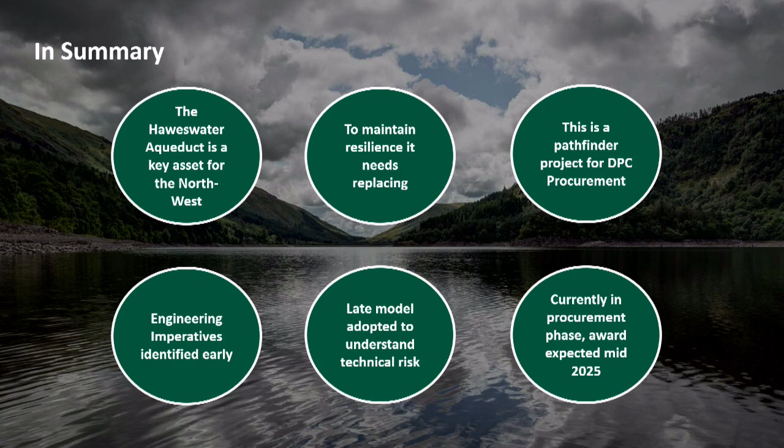Maybe in the future, if you're interested, we can come back and tell you how it's getting on once we actually get this thing up and running. But it's been a real labour of love to get us where we are today, and we're looking forward to the next bit. So that's it.

Thank you very much for that fascinating project, generational, as you said.

At the back there, could you knock the spotlights down a little bit, please? Yeah, that's much better, thanks. So, questions, please.

Wow. Yeah, question there.

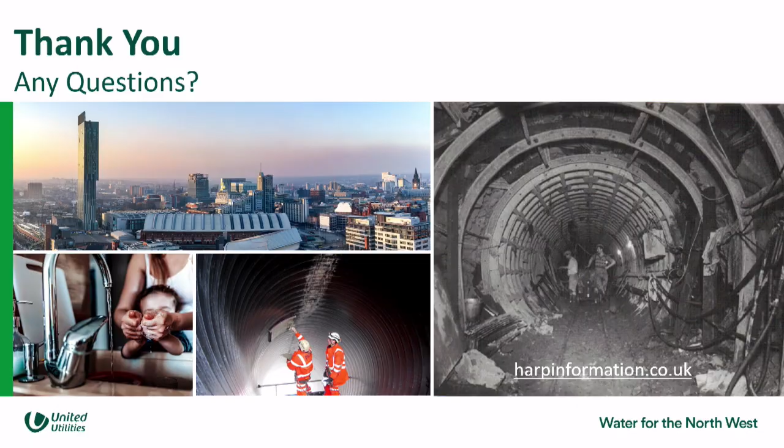Hi, Tom Robinson, Strabag UK. Very interesting talk, thank you, that was fascinating. Quick question about the planning process - there's a conscious decision to go with separate planning applications for all of the statutory authorities on the route. Was an alternative, something similar to a hybrid bill or Crossrail Act type concept, ever proposed or considered?

It's a good question. I wasn't actually involved in the project back in those early days, but we just went down the conventional town and country planning route. I'm not sure whether we ever looked into DCO or anything - are you aware, Nick? I think we did, if I'm honest. I won't be able to say more than that we did look at it, and the pros and cons were considered. I think we've got very good relationships with our local town and country planning route, and I don't know whether that played a part, but it was considered, and the experts we spoke to within United Utilities and externally recommended the approach we took. I don't know if there were timescale issues to get something like that in place or not, but it was considered - we can take it away and get a proper answer.

Yeah. Okay. Yeah, question. Yeah. Hi, thank you so much. Tomasz Szogola, Strabag UK.

First question, from your experience to date with the local residents, how satisfied or dissatisfied have they been with the current engagement? We know that in the UK, infrastructure projects bring a lot of attention, also protests like HS2. What's the feeling you're getting from the local residents? And the second question, what are your first thoughts about the muck disposal? Where? I can't hear.